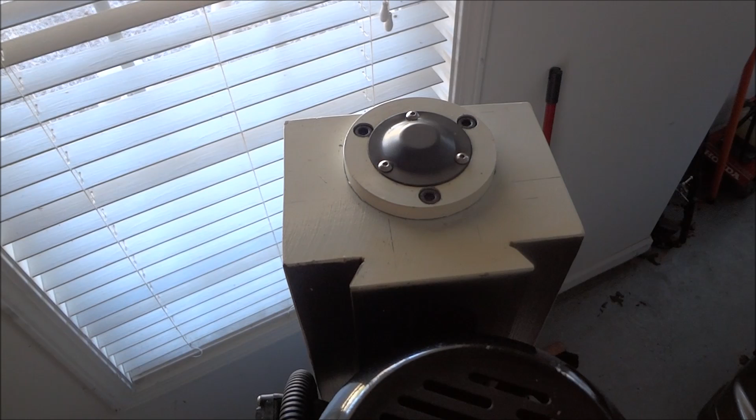Hey guys. Okay, so now that we've got our y-axis finished up, it's time to work on our z-axis.

And this is the top of my column here. And so basically, I just want to do the same thing I've been doing. I just want to make a tracing of this, and then we can draw up our mounts. So we have this little cover here that needs to come off.

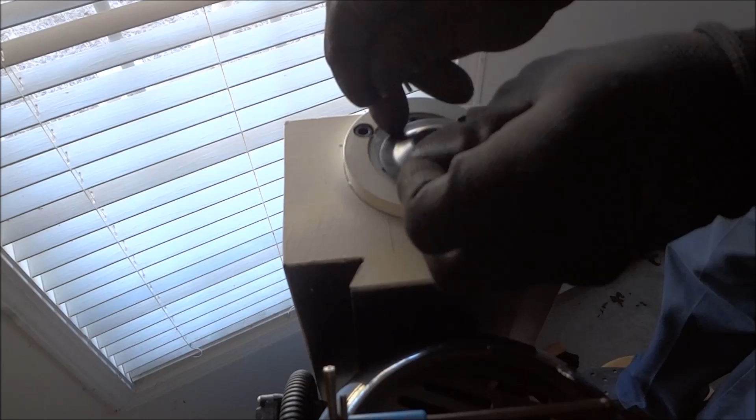There's our, we have our nut for our ball screw there. We also have these nuts right here, these screws right here that's got to come off. These are M6. Okay.

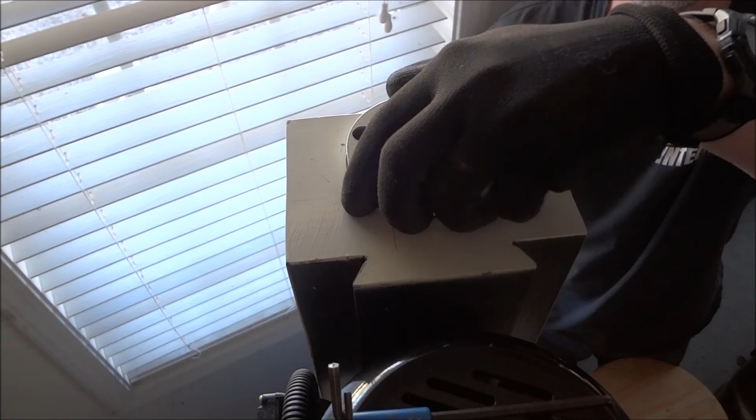Now what I've done is up under the spindle, I've just put a block, and when I raise the spindle, lower the spindle, it should raise this block up some. Okay, it's only going to raise it up just a little bit. On the back side here, you can see it raised it up just a little bit.

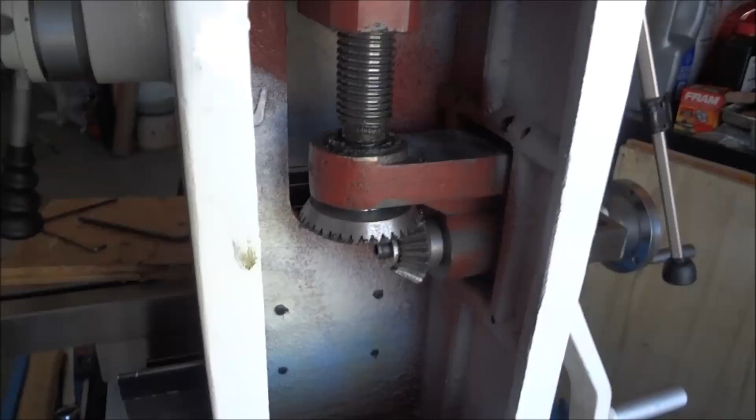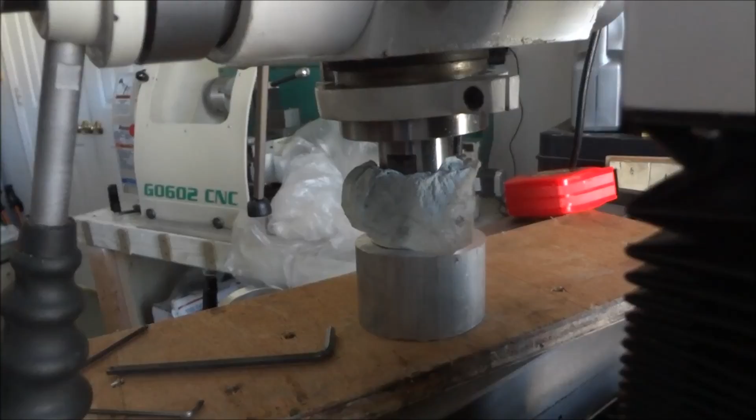Okay, on the back side I've got this cover here, so I'm going to take this cover off and let's take a look and see what's behind there. Okay guys, so you can kind of see how it's set up inside the column here. All of this is going to be removed, and you can see that originally it only went down about another 2 inches of travel on the Z.

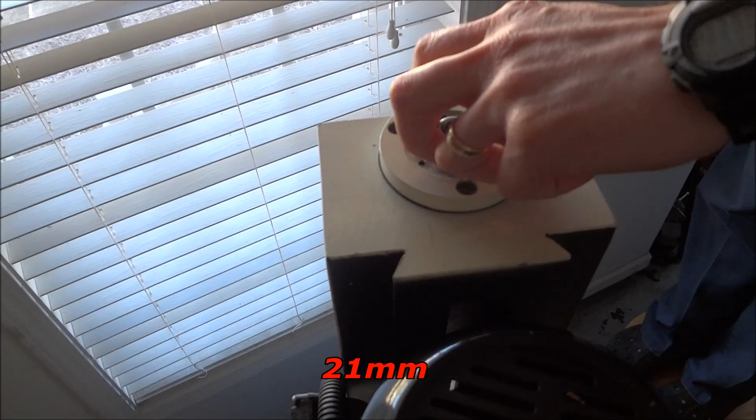Now, I've got this loose. Oh, let me get back up here. Okay. Got this loose, and so this I used a 7/8 inch wrench. I think it's probably a 21 millimeters. It's just a nylon lock nut,

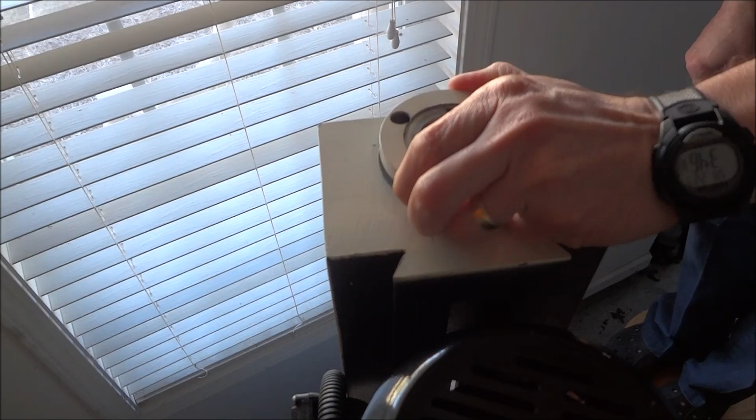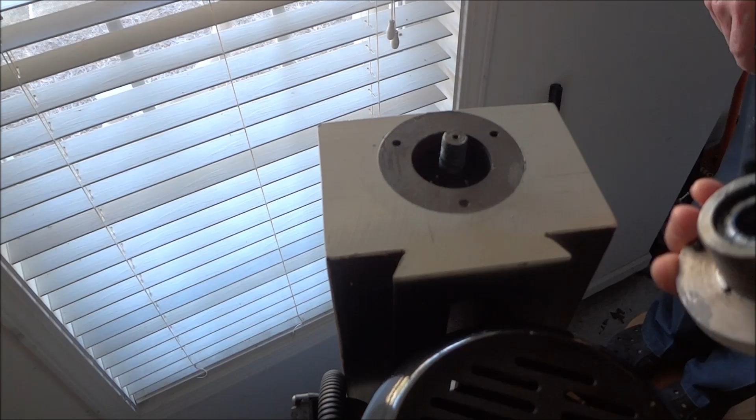and you can just pull this right off the top there. It's just got a thrust bearing in it. There's the race for the thrust bearing, and then the thrust bearing is just down in there. And that's it. It's just a hole and the 3 holes. So what I want to do is I want to just get me a tracing of that. So let me get some paper and a pencil.

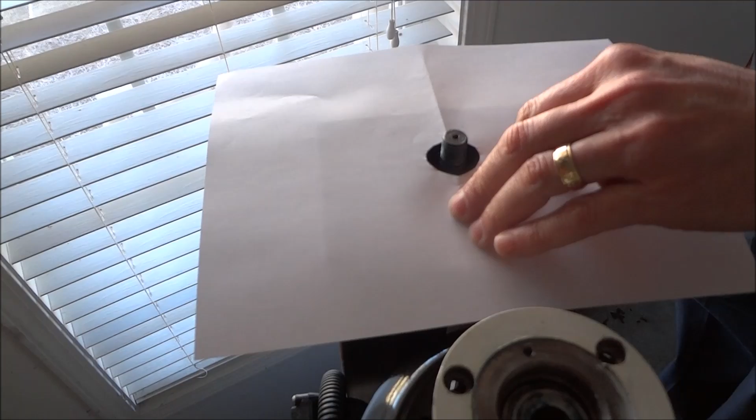Okay. Really sophisticated here. Okay, get a good crease here. Alright. There we go. You guys know the drill here. I'm only concerned really about these 3 hole locations and this center hole circumference.

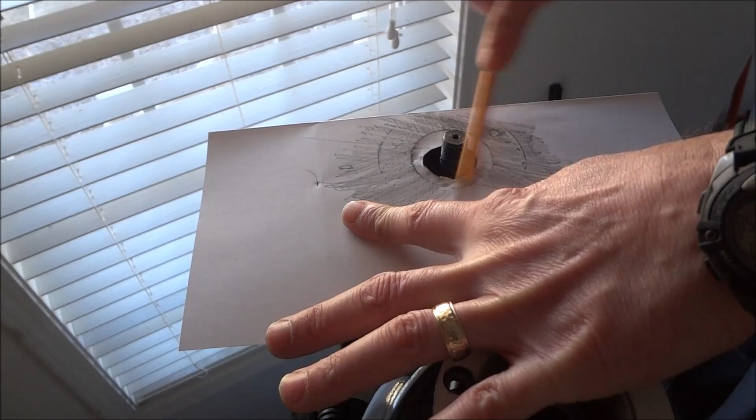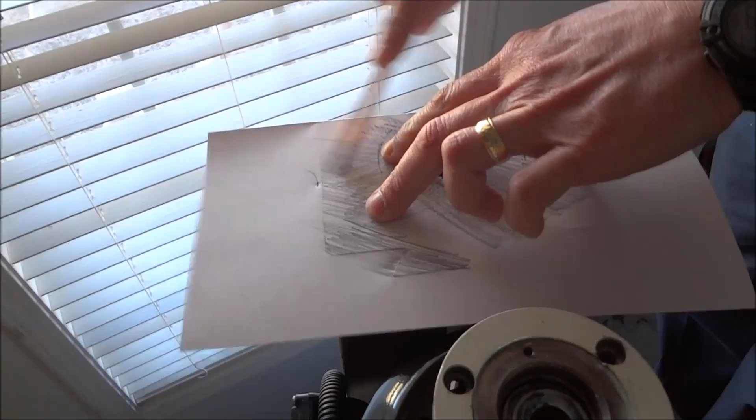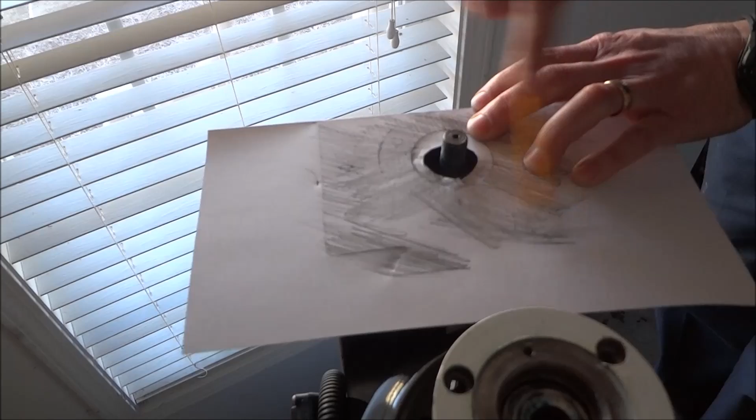You can trace your dovetail if you want, so you can get a nice drawing of your column. Alright, there we go, it's good enough.

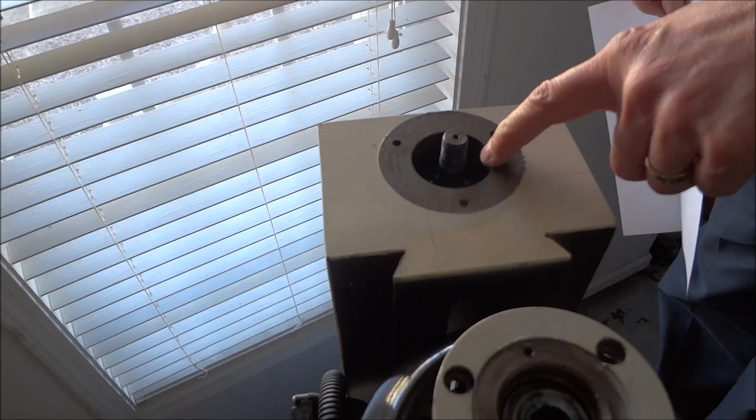Now what I want to do is I want to just get my calipers and double check this diameter, or actually I'll just measure this probably. Pretty straightforward. So we'll take this information here and we'll transfer it over into Fusion 360.

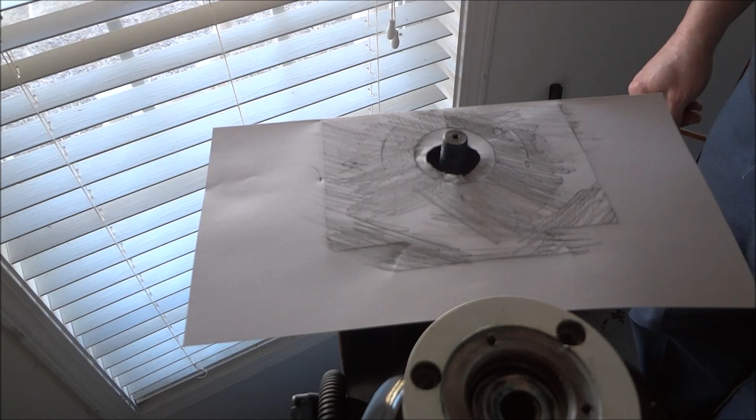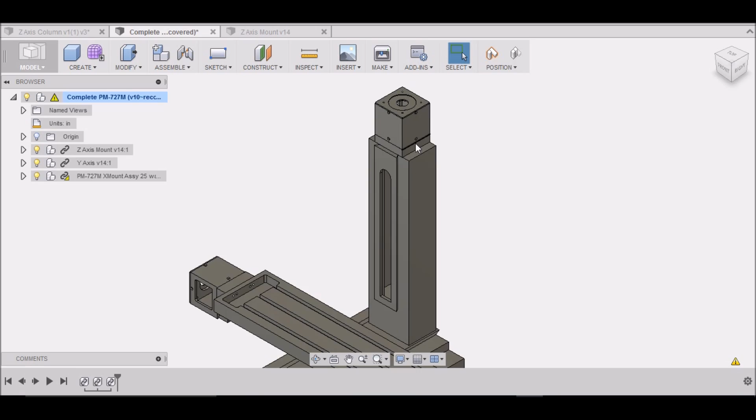Hey guys. Okay, so in the last video we worked on our y-axis and we finished that up and did the stepper mount. So now in this video we're going to start on our z-axis bearing block. As you saw earlier, we made our tracing of the top of the Z column. And so what I did was I came into Fusion 360 and I took that tracing and I drew our column here. Now I just want to start doing the mounts.

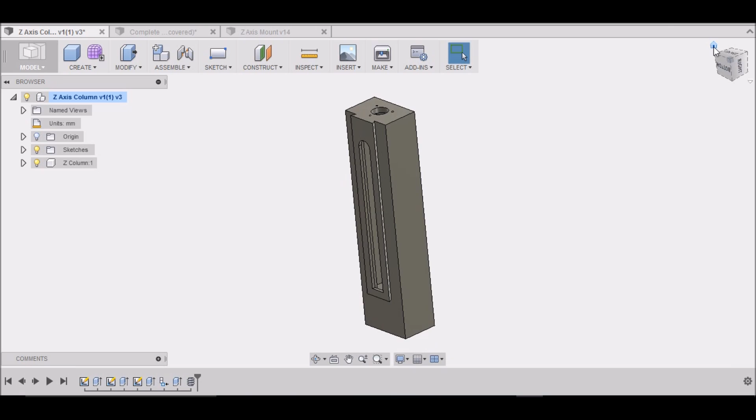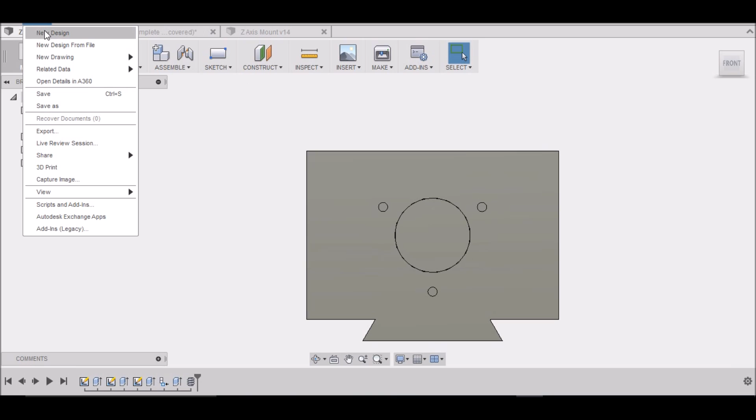This is pretty straightforward and simple. Sketch here. It's just the outline of your column and circle and 3 holes. So now for our bearing block, we want to go up to File, New Design. We want to save this as Z-axis bearing block. Alright.

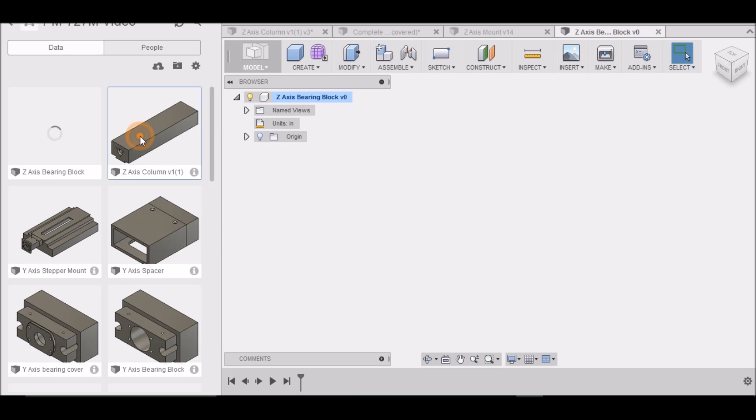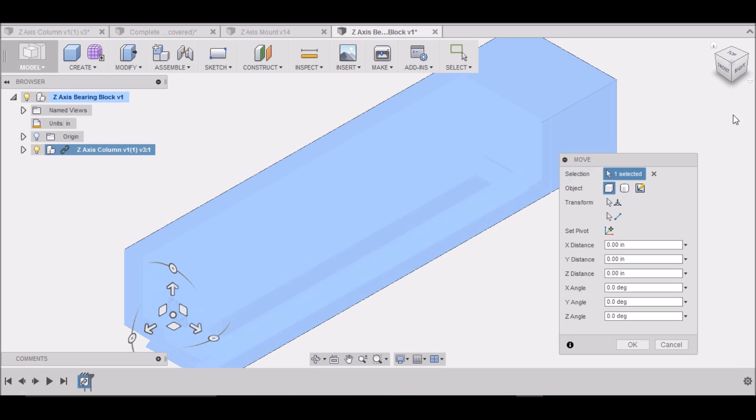And then we want to pull up my data panel. And I want to click on my column that I just drew. And I want to insert it into the current design. We can close our data panel. Now, this is the Z direction, and I'm going to leave mine where it is. Click OK, and I'm going to be drawing on the front here,

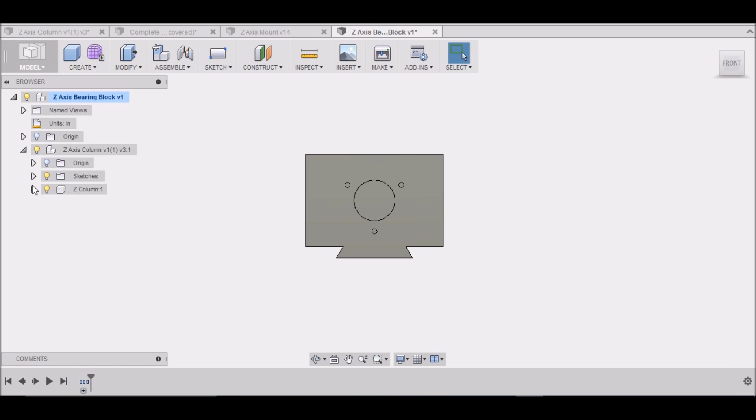like so. Okay, so after we've inserted this into our new design, we want to right click up here where the chains are and break the link, so that we can manipulate this component. And now we're able to turn the sketches on and off. There we go. And we can turn our column off. We don't need that right now.

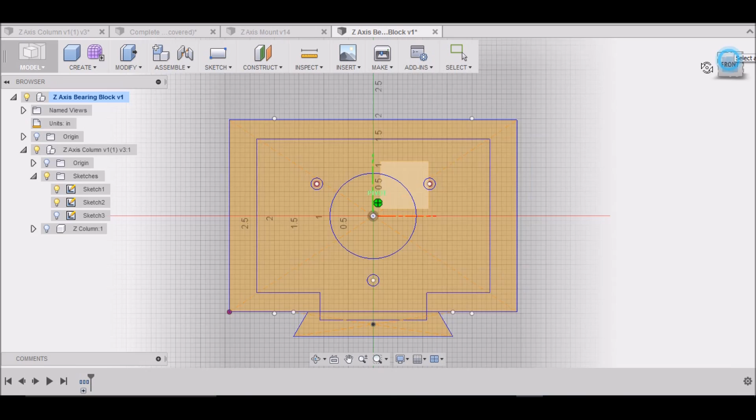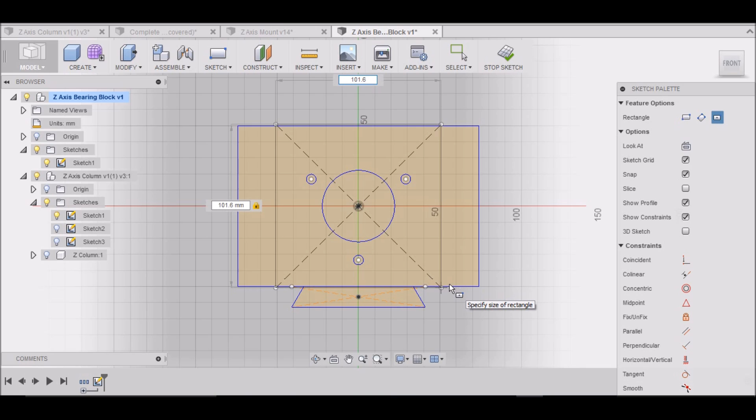Okay, so the first thing we want to do is we want to go to Sketch, Create Sketch. We want to click on this plane right here. Got Sketch, Rectangle, Center Rectangle. We want to go 101.6, tab 101.6. Click.

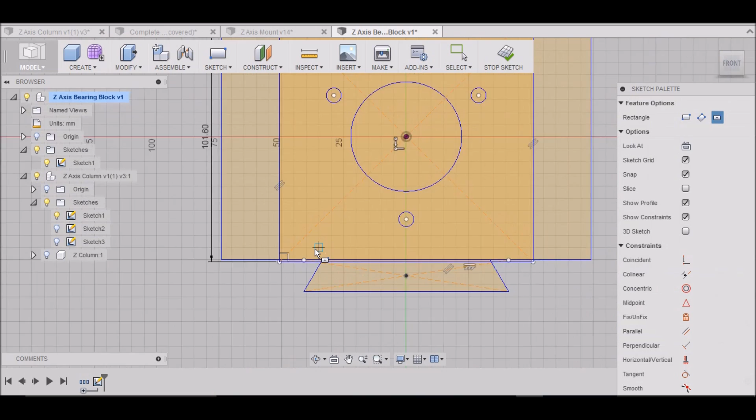Okay. Now you can see that this is 4 inches by 4 inches, and you can see that it hangs over and kind of blocks our dovetail, and that's going to prevent our head from coming up. So I want to notch this out, because our Z-axis will travel 18.5 inches, and it's going to go past the top of the column about 1 3/4 inches.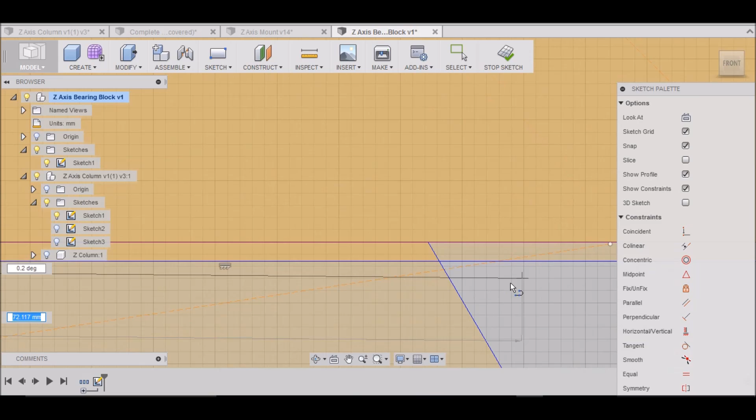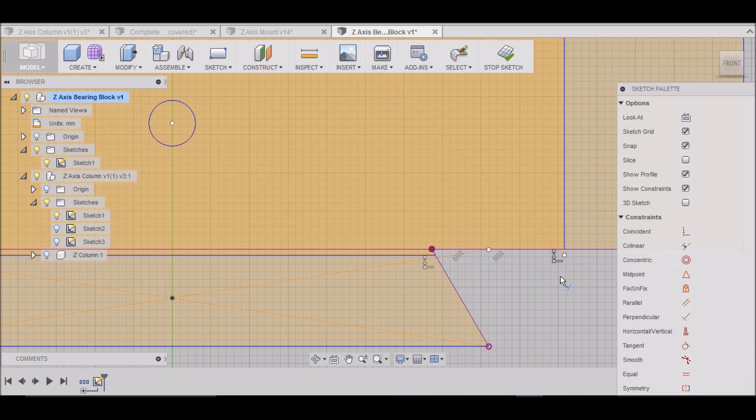So I want to go and hit L, and I want to draw a line from here to here to there to there, there to there. Then we can go up here, select trim. We can trim this line, and this line, and this little line, and these lines.

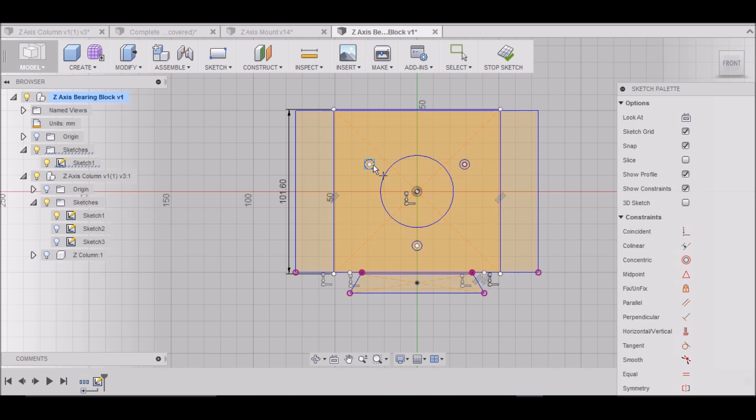Okay, let's see, that looks good. I want to go to sketch point, and I want to put a mark here, there, and there for our 3 holes to mount it. I want to hit C for circle, and right in the center I want to put a hole that is 44.35. I want to put a second one that is 35 millimeters, and a third one that is 22 millimeters.

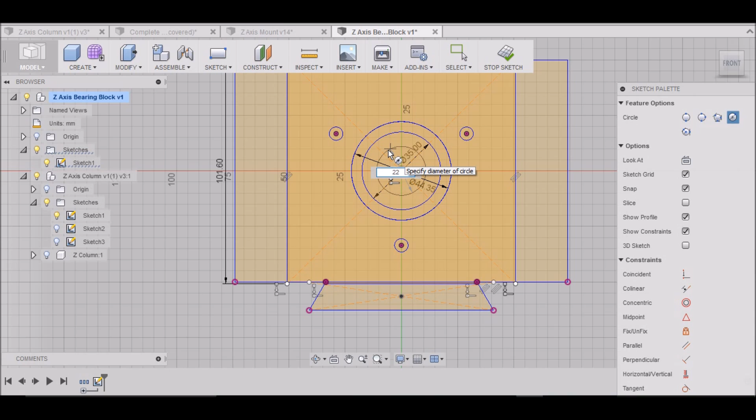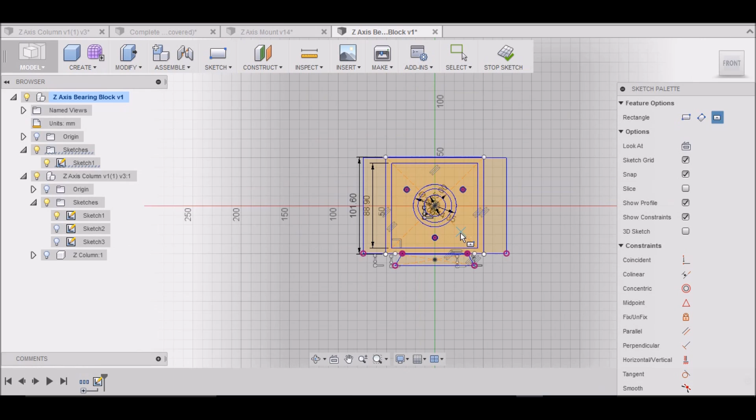Alright, go up to sketch, rectangle, center rectangle, and I want to go 88.9, hit tab, 88.9, hit enter. This will be for our square tubing. Alright, so we can hit stop sketch. Let me turn this one off. We can get rid of this stuff.

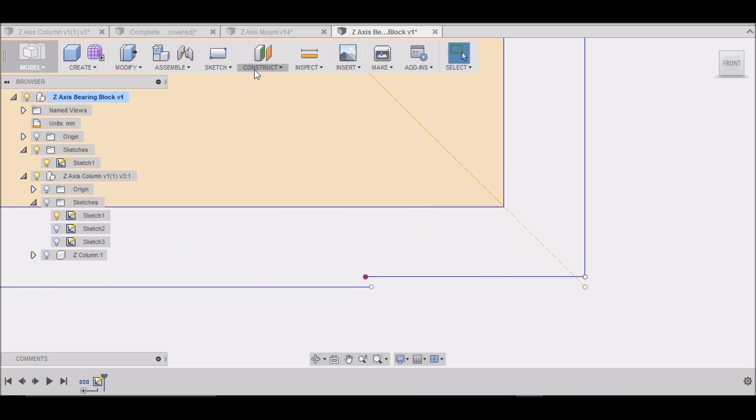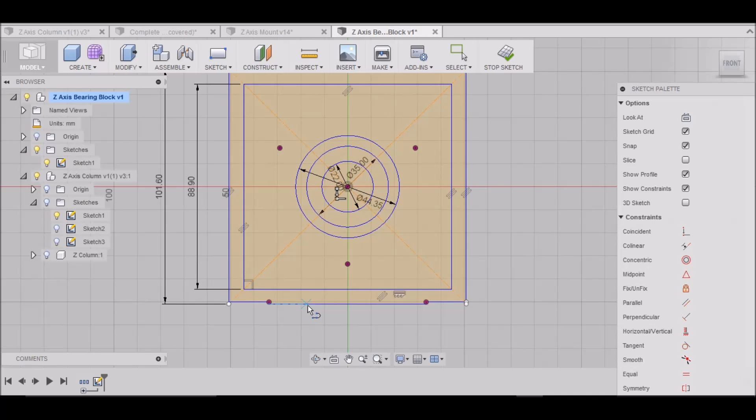Alright, something's not connected here. Okay, right there. Let me edit that. Put this line back here. Hit L. There we go. L. There to there. Okay, there we go. That looks good. Stop sketch.

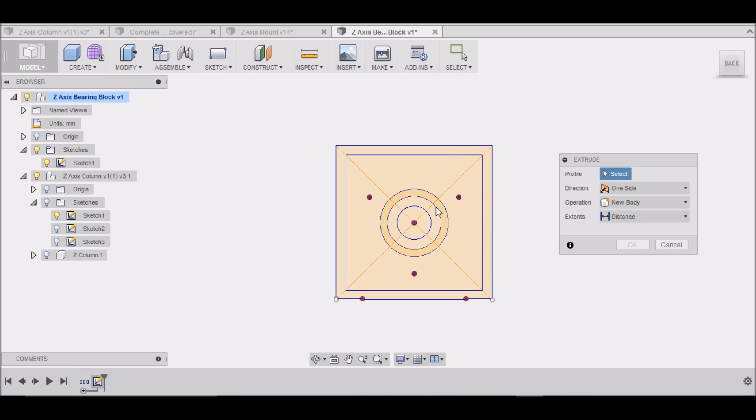Alright. So the first thing we want to do is I want to go to the back side here. I want to go to modify press pull, and I want to select this. Nope, not that. I want to select this and this, and we want to move them minus 6.35 millimeters. That looks right. Hit OK. We've got to turn our sketch back on. Alright, we'll go back to the front isometric view.

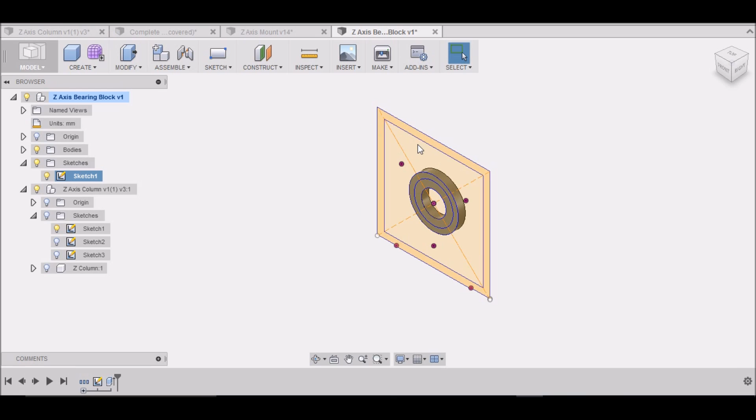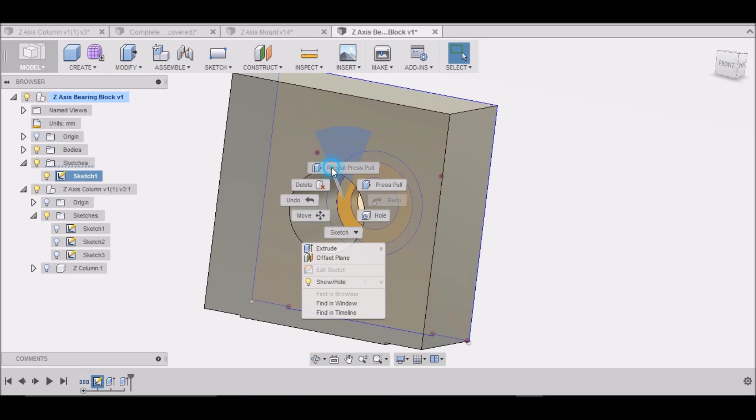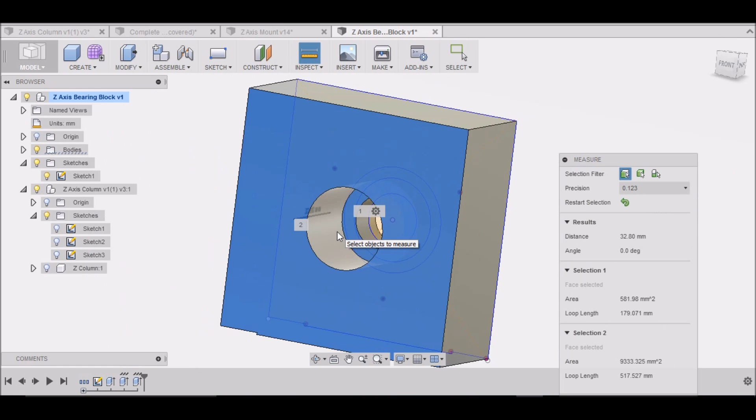We'll move these 44.45. Alright. We want to select this, right click it, repeat press pull. We want to move this 11.65 millimeters. Okay, now that should give us, let's check that measurement. Click there and here, 32.8, that is correct. Alright, so that gives us that dimension.

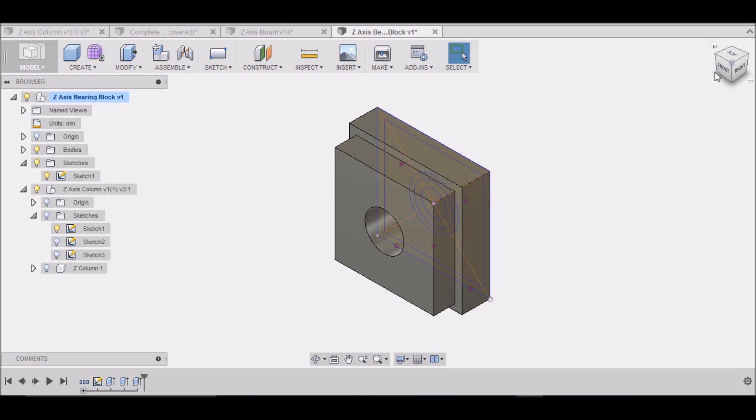I want to go to this area, I want to right click, repeat press pull. This will be 25.4 millimeters. Select OK. Alright, we want to go to the front here. We want to put some holes. So we want to go to create hole. We want to select this face right here. And then it wants it to be 44.45 deep. It needs to be a counter bore, 6.1 diameter, and 11 millimeters on the counter bore.

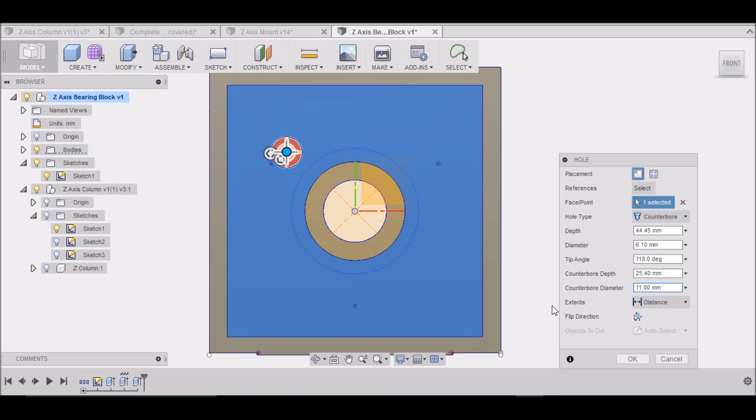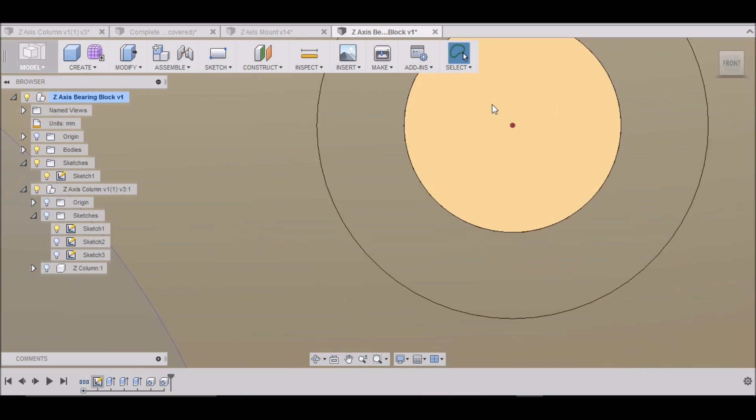And we need to move it right over this dot. If you zoom in really as far as you can, get it right on it. Click OK. Zoom out. Go to this hole, this dot. Right click right on the point. Repeat hole. And it'll put it right on top of there. It remembers the same information we just put in. And we'll do it once more right here. Right click, repeat hole, click OK.

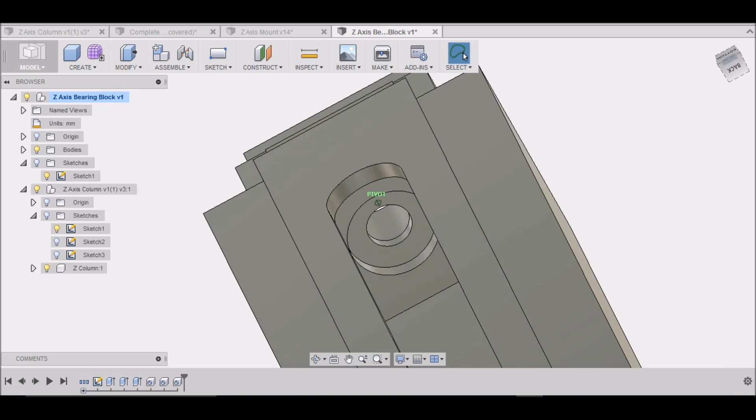Alright, let's see what that looks like. Okay, that looks good. Now you can see that's going to give us a little relief right there for our column. Where's it at? Right there. And then that way we'll at least be able to slide up 1 inch right here. So I think that'll be good.

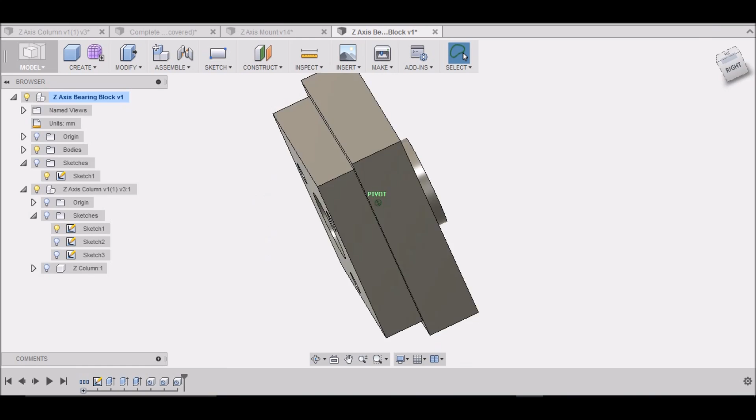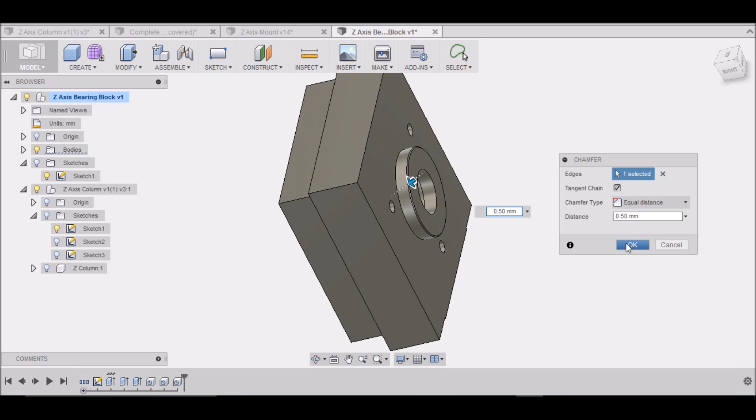Okay. Now, one last thing I want to do. I want to go to the back side here. And I want to go to Modify, Chamfer. I'm going to just put a chamfer right here. Just small, 0.5 millimeter. There we go. And that should be good. Let's do this side right here as well. Control, and then click on that one. And then that way we can make sure that the bearing doesn't rub.

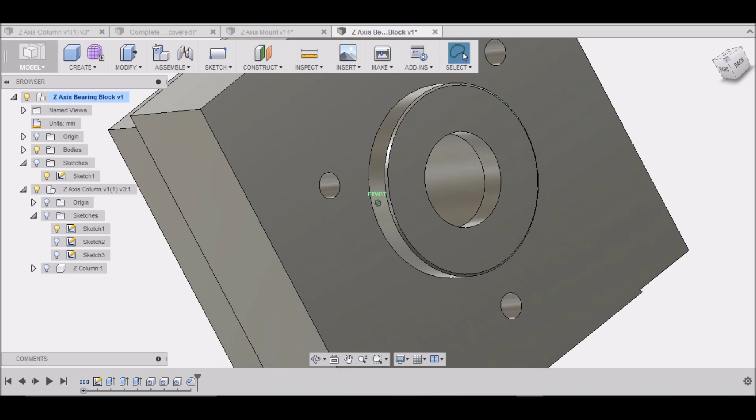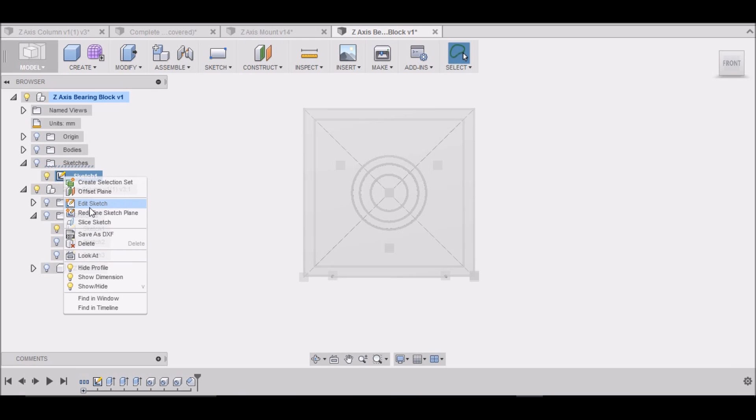Alright. Let's go back to the front. And I want to go back up to our sketch. Let's turn this off for the moment. Go to our sketch and edit sketch. Make sure our sketch is on. Okay. I want to draw a line here straight up. 22.015. Enter. Alright. Then I want to hit C for circle. And I want to draw a 4 millimeter circle here.

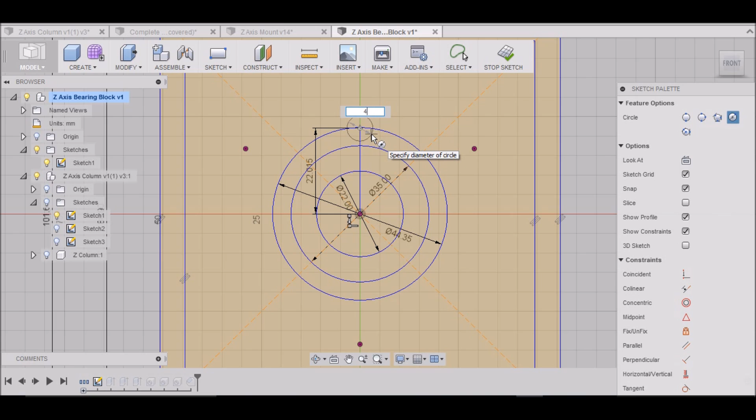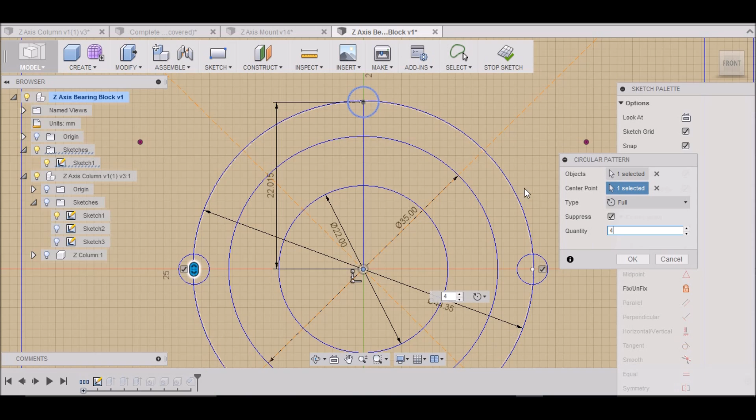Then I want to go to Sketch, Circular Pattern. I want to select this as my object. I want to select this as my center. Nope. Select this as my object. Click over here. Select this as my center. And I want 4 of these. Okay. Select OK. We can stop our sketch. There we go. Alright, we want to go to Create Hole.

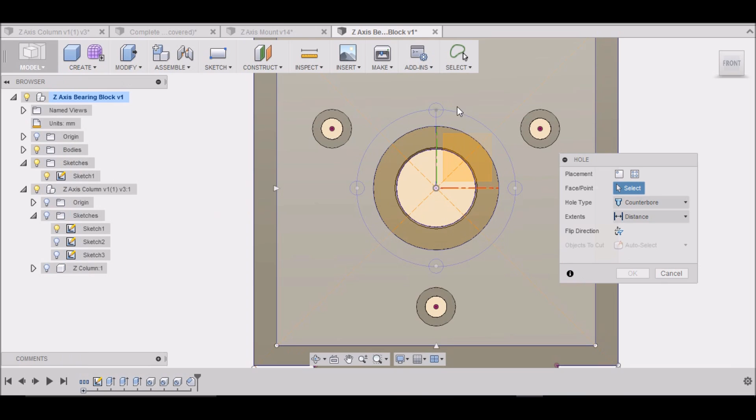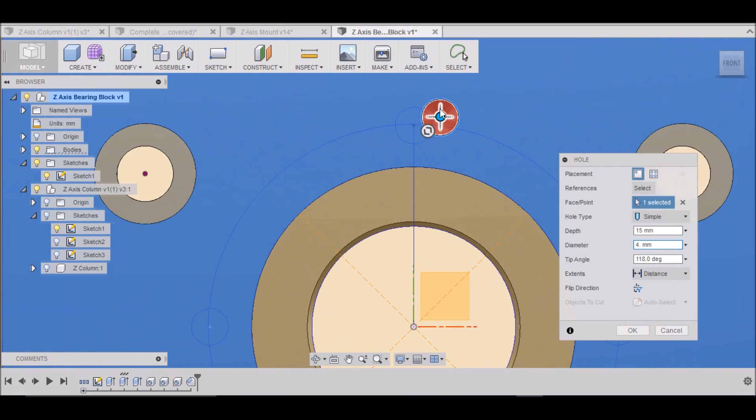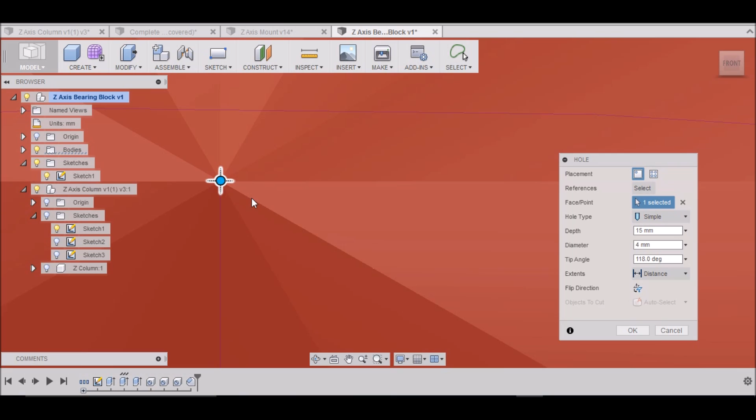One hole right here. It needs to be a simple hole. It needs to be 15 millimeters deep and 4 millimeters in diameter. And it needs to go right on top of that dot. Right there. Okay. Looks good. Put one on top of this dot.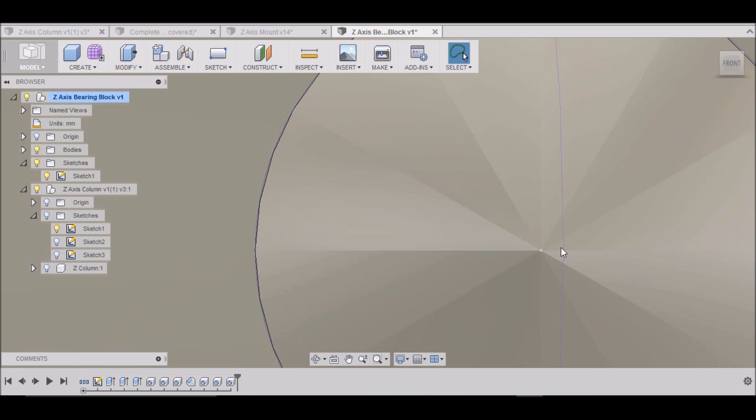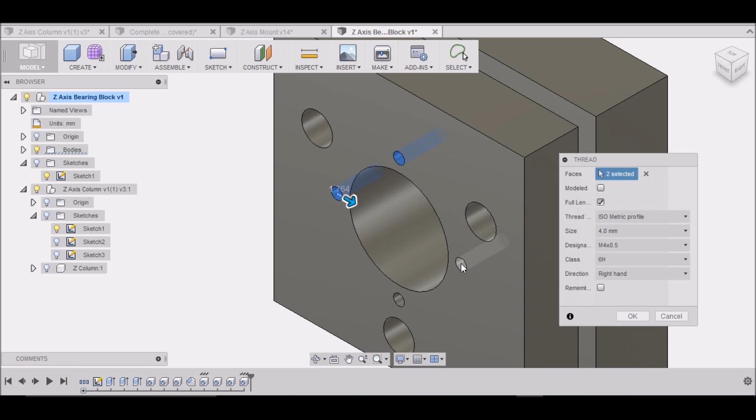Right click, repeat hole. We can hit OK. That looks good. One right here. Right click, repeat hole. Click OK. And right on top of that dot, right click, repeat hole. Very good. Alright, we can turn the sketches off now and go back to our isometric view. These are the holes that mount our bearing cover. We need to thread these. Hold down Control and select the inner walls here. There we go.

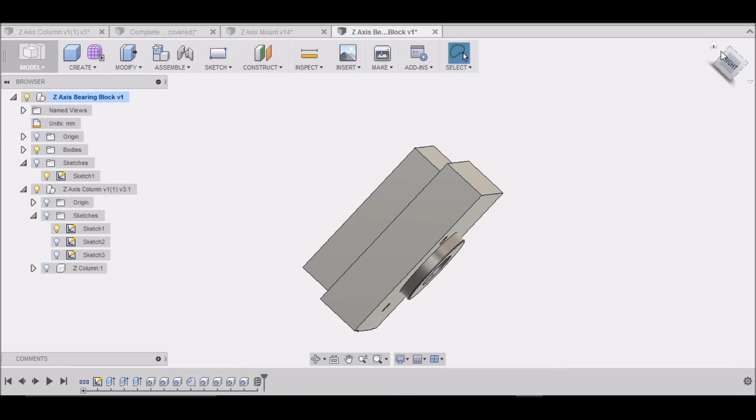Alright, well that is our Z-axis bearing block. This recess here will go down into our hole that's in the top of our column, and then we'll just bolt it up with these 3 holes right here. Our bearings will fit down inside there, and then our cover will go on. And in the next video, we will work on our spacer. So stay tuned for that.